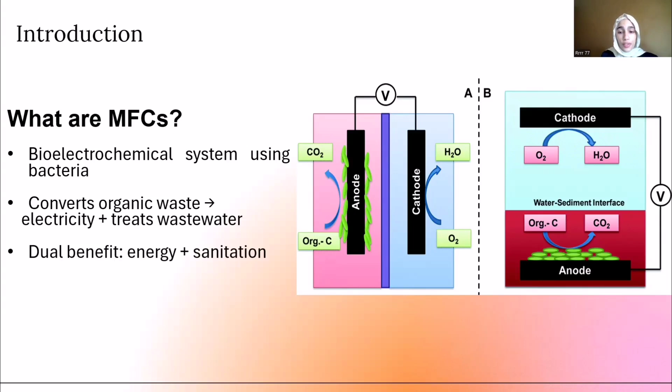So, what are microbial fuel cells, or MFCs? Microbial fuel cells are bioelectrochemical systems that use bacteria to generate electricity. The bacteria consume organic waste, releasing electrons, which we capture as energy. This process not only produces renewable electricity, but also treats wastewater at the same time. So, microbial fuel cells give us a dual benefit: clean energy and sanitation.

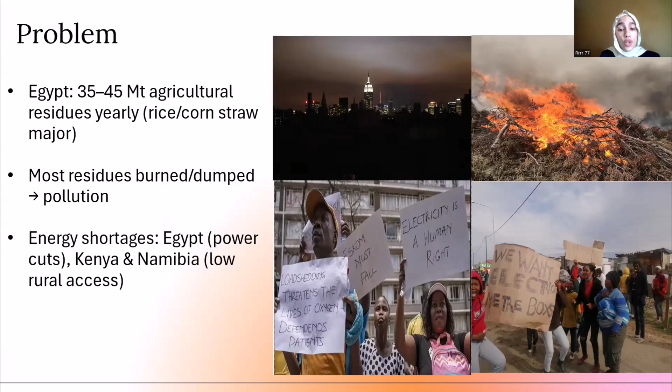And in Egypt alone, about 35 to 45 million tons of agricultural residues are generated every year, with rice and corn straw making up the largest share. Most of this waste is burned or dumped, creating significant pollution. At the same time, Egypt faces energy shortage, such as power cuts, while other countries like Kenya and Namibia struggle with low rural energy access. This creates a clear opportunity to turn waste into resource.

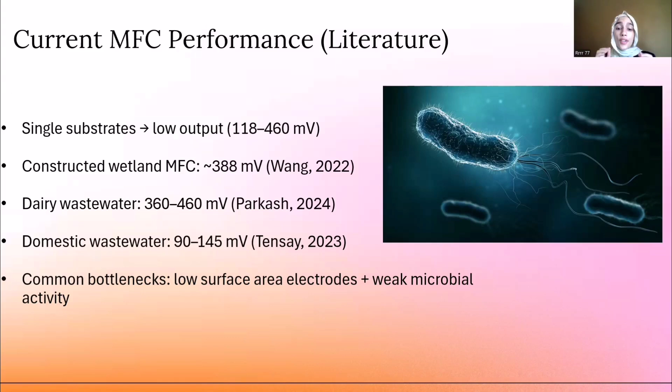Looking at the literature review, performance from single substrate is quite limited. For example, constructed wetland microbial fuel cells reached about 388 millivolts. Dairy wastewater gave around 360 to 460 millivolts. So the common bottlenecks across these studies are low surface area electrodes and weak microbial activity. So improvements in materials and design are needed.

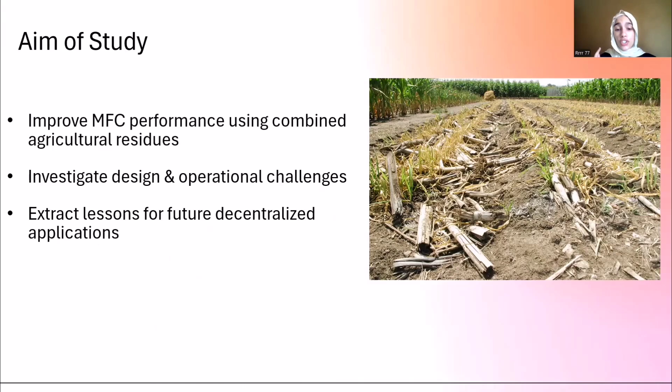The aim of my study was threefold. First, to improve performance using combined agriculture residues. Second, to investigate design and operational challenges. And third, to extract lessons that could guide future applications of this technology.

So, let me tell you about our two-phase experiment. We carried out the study in two phases. In phase 1, we began with a simple microbial fuel cell setup. The electrodes were modified with activated carbon from rice and corn straw, activated at a ratio 1:1 biochar to KOH. This gave us a power density of 226 milliwatts per square meter.

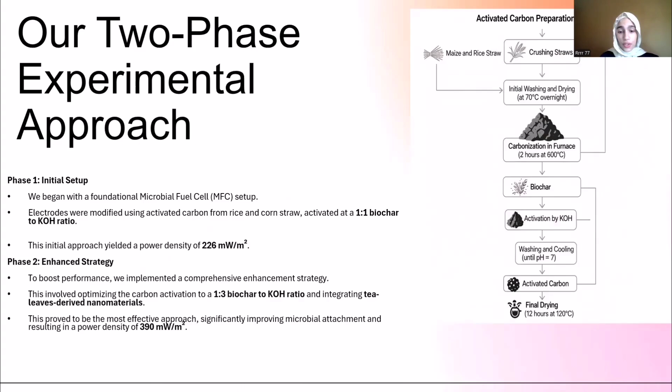In phase 2, we enhanced the strategy. We optimized the activation ratio to 1:3 and also added nanomaterials derived from tea leaves. This approach was far more effective, significantly improving microbial attachment and resulting in a power density of 390 milliwatts per square meter. Here is our biochar when we get it from our tubular furnace after pyrolysis, and here is our first experiment and our second experiment.

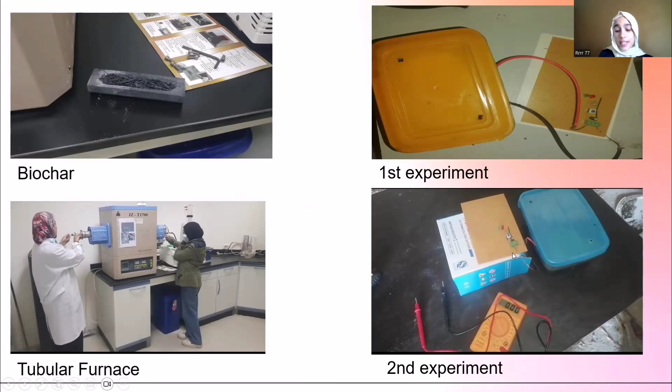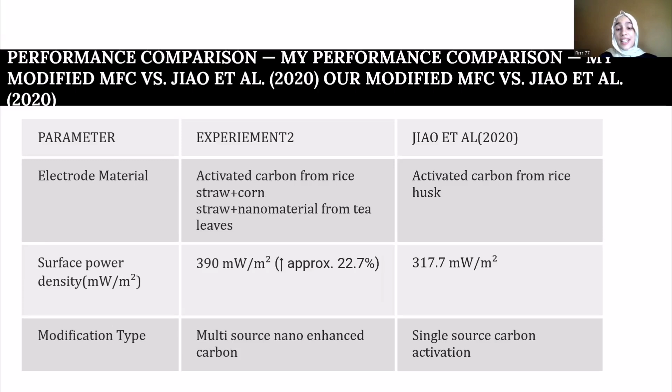Here, I compared my results with a study by Jiao and colleagues from 2020. While their electrodes used activated carbon from rice husk, mine combined rice straw, corn straw, and tea leaf nanomaterial. Their system reached a surface power density of 317 milliwatts per square meter. In contrast, my experiment achieved 390 milliwatts per square meter, about a 22% improvement, thanks to the multi-source and nano-enhanced carbon.

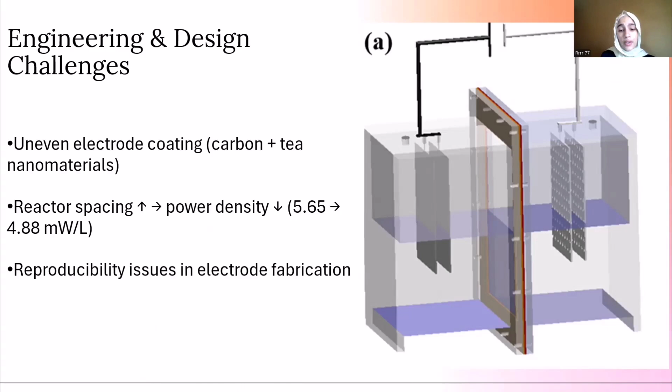However, there were clear engineering challenges. The electrode coating was sometimes uneven when mixing carbon and tea nanomaterials. The tubular reactor increased the electrode spacing, which lowered power density because resistance had increased as the spacing between the two electrodes also increased, and reproducibility was an issue since electrode fabrication was not always constant.

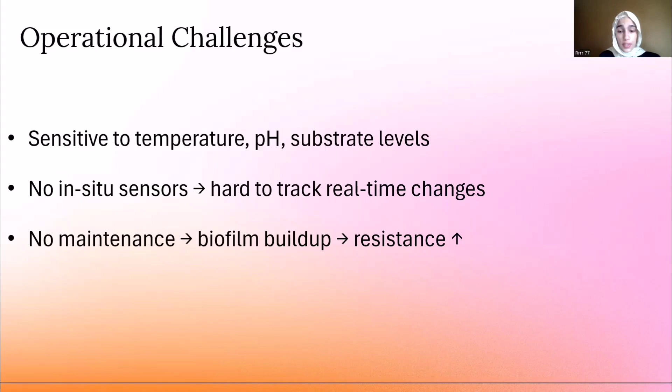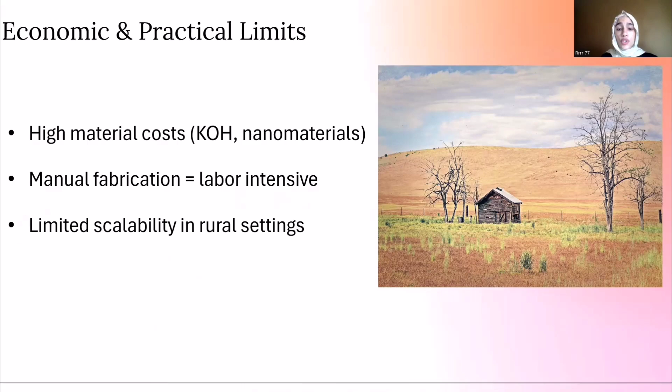Operationally, the system was very sensitive to environmental factors like temperature, pH, and substrate levels. We also lacked in-situ sensors, so it was difficult to track real-time changes. And finally, with no maintenance during the experiments, biofilm build-up increased resistance and reduced performance. And there were also economic limits we have mentioned in our paper. Materials like KOH and nanomaterials are relatively costly. Fabrication was done manually, which was labor intensive, and scaling up this method in rural areas remains a major challenge.

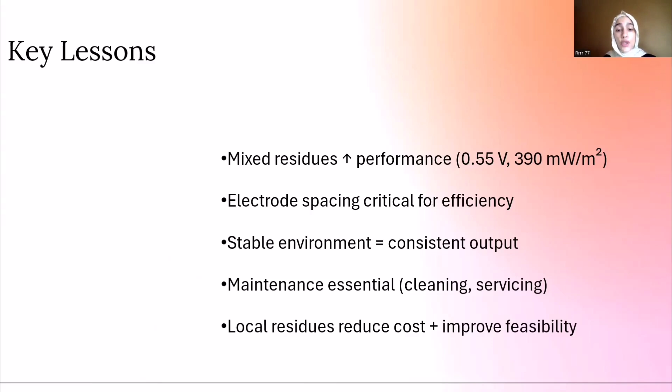From all of this, there are several key lessons we have to learn. First, mixed residues improved performance, reaching 0.55 volts and 390 milliwatts per square meter. Second, electrode spacing is critical for efficiency. Third, a stable environment is essential for a constant output. Regular maintenance, like cleaning and servicing, is also necessary. And finally, using local residues lowers costs and improves feasibility.

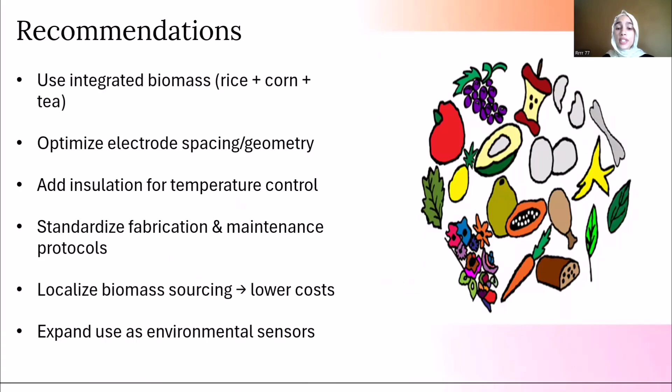Based on these lessons, I recommend the following. Use integrated biomass sources like rice and corn and tea leaves, optimize electrode spacing and geometry and insulation for better temperature control, standardize fabrication and maintenance protocols, and prioritize local biomass sourcing to reduce costs and improve sustainability. These steps can also expand the use of microbial fuel cells as environmental sensors.

In conclusion, microbial fuel cells can transform waste into energy while treating wastewater. My study shows that mixed biomass and design improvements increase performance, but the systems are still limited by cost, predictability, and environmental sensitivity. With further development, however, MFCs have real potential for decentralized energy production and real-time sensing, and also contributing to the UN Sustainable Development Goals and rural sustainability.